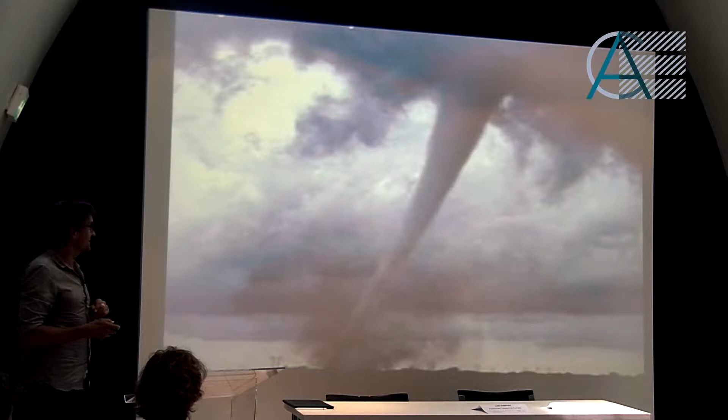So we start here. There's text missing on the upper side, but don't mind. It's a bit in the sense of once upon a time, people had to protect against the cold, the coldness, the wet, the rain, the flood, stormy weather, and so on, and the wild beasts. And so they had to find some shelter to protect. But it was cold in these caverns, so they had to invent the fire to get some heating and fire for other supplies, for other opportunities.

What then happened? It was so comfortable in these hot caverns that the population grew. And we had so much population in this world that the caverns were not anymore sufficient for these people. What should we do now? That's what had been done.

Trying to understand what could be done. Oh, it's really bad.

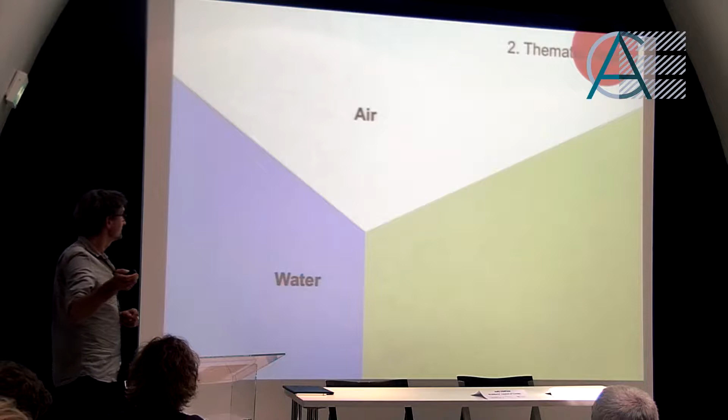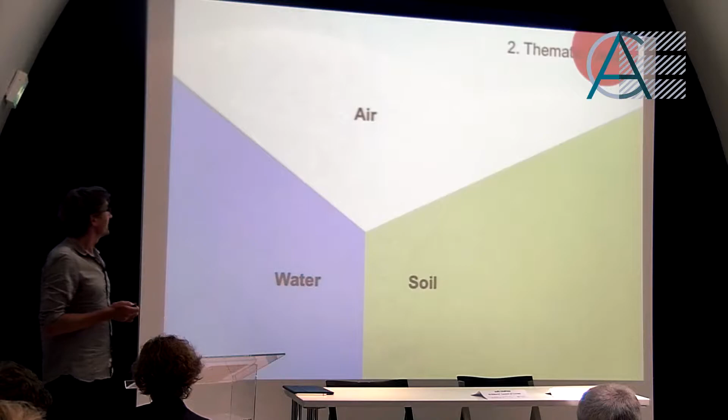Then we have these thematic fields. This is the air, the water, and the soil. So all these 3 are components, compounds that we are using as resource, and we are emitting in the air, in water, in soil by our acting. And in all this, there's energy, which plays a crucial role, or an important role, should I say. And there has to be a balance between all these 4 elements: air, water, soil, energy.

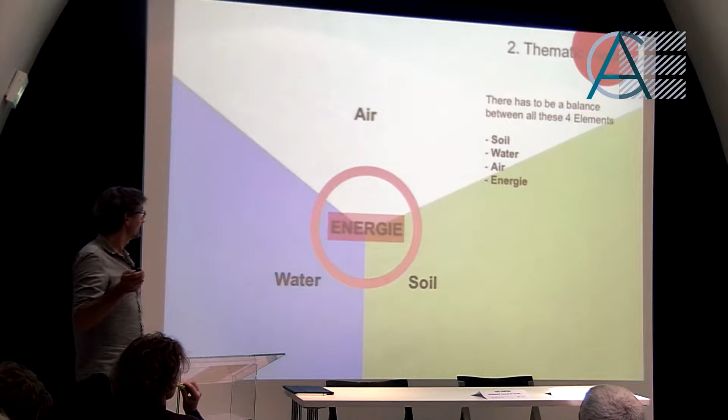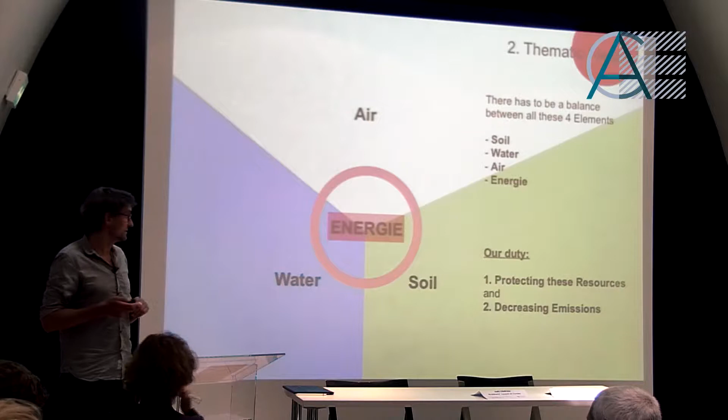Yes. And it's a bit our duty to protect these resources and to decrease or avoid emissions. And in fact, in a certain kind of definition, these 2 points, protecting resources and decreasing or avoiding emissions, are the basic points of sustainability.

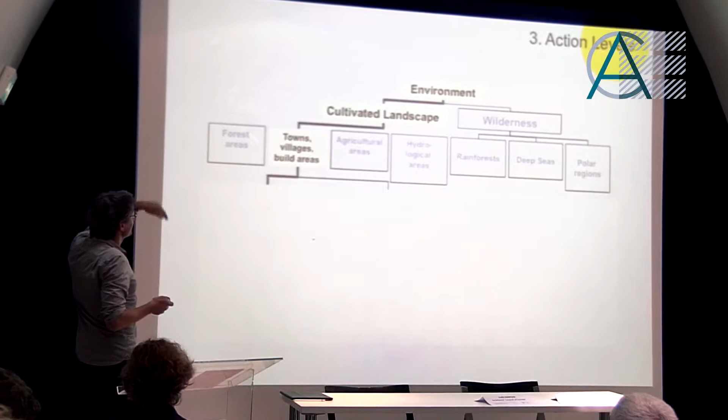So the action levels, for example, the environment globally thought, and perhaps cultivated landscapes, there's a wilderness, and we will follow the left path. For example, the next level, towns, villages, built areas. Other will work on forest areas, agricultural areas, hydrological areas, and so on.

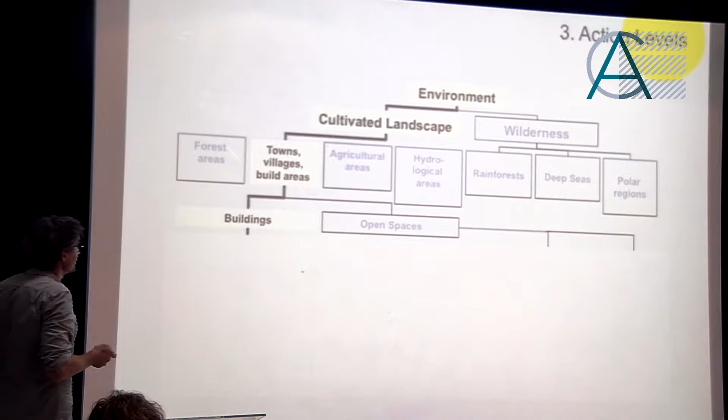Then we go beyond on buildings, on the other hand, they are open space, not built areas. We're going down to the type of buildings: production, living, commercial, and so on. In the open spaces, we have, for example, playgrounds, parking, and other places, and so on. So you go beyond, and on every level, you have the discussions about resources and emissions. And we go down to the walls, for example, perhaps wooden walls, why not?

So we have these 3 points, the global context, the fields, and the action levels, who has to be combined and viewed together. Efficiency.

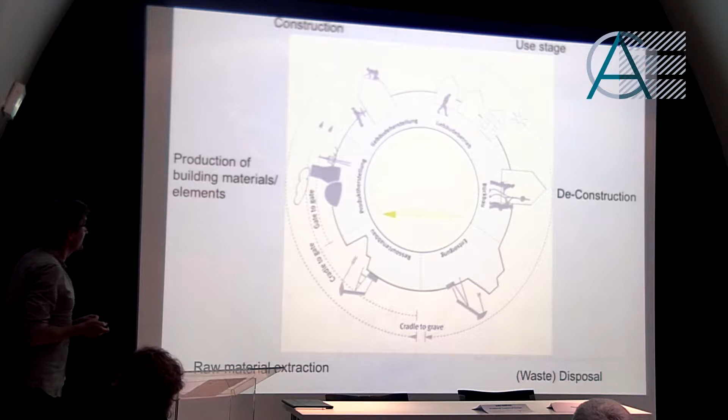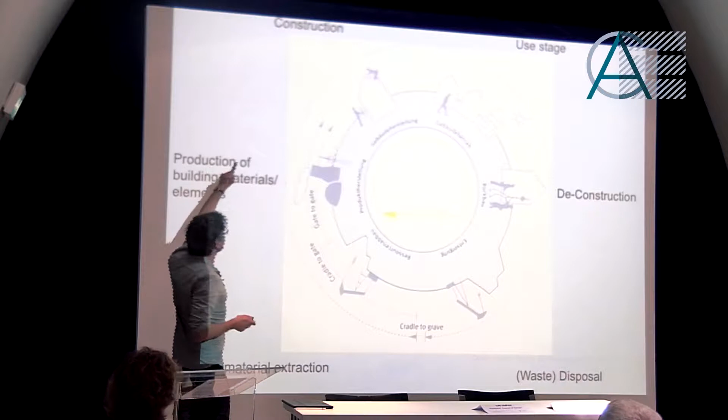So, this is a well-known figure. I think all of you will know it. It's about, c'est un cercle, it's a circle, it's the circle of sustainability. And perhaps we start from raw material extraction, are going to production of building materials, elements. We are building a house, it's construction, the use stage, the deconstruction. And if all is going well, we can pass directly from the deconstruction to the production of building elements and restart from zero. Otherwise, we will have the stage of waste disposal or disposal of the unusable material.

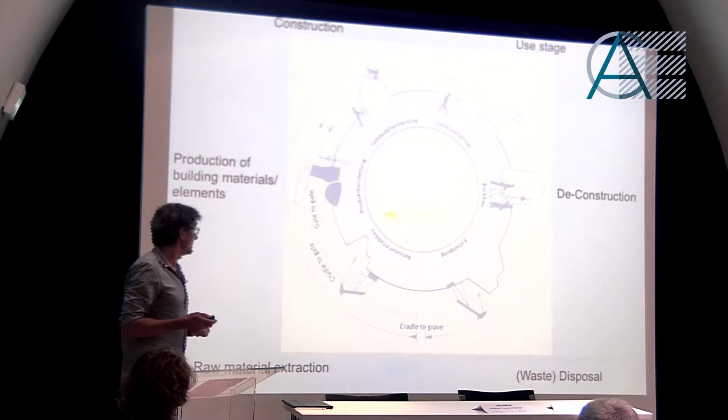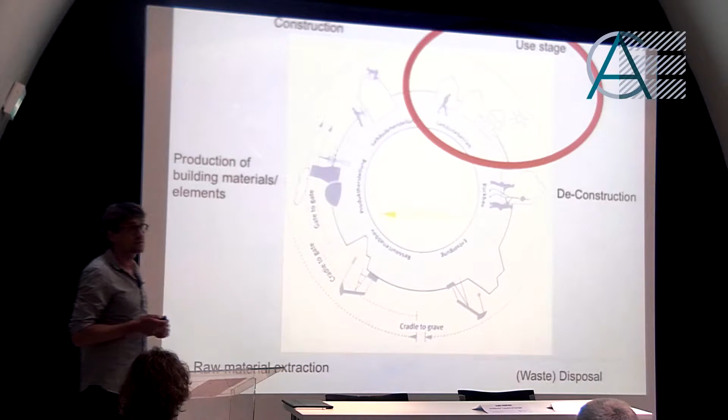So, and mostly we are occupied by viewing and dealing and calculating in the field of the use stage. So our energy efficiency debate is mostly about these figures. The EPCs are based on that.

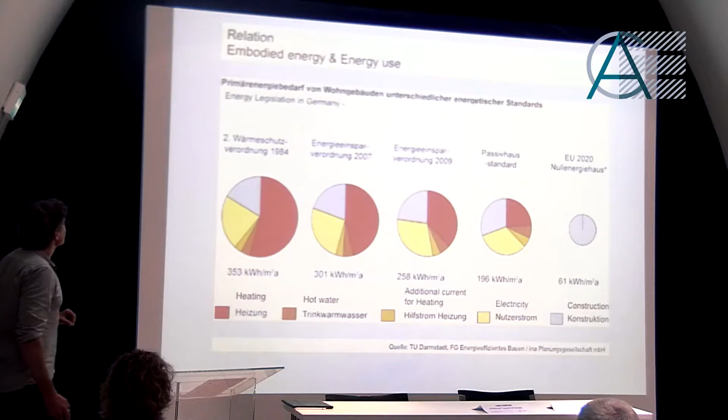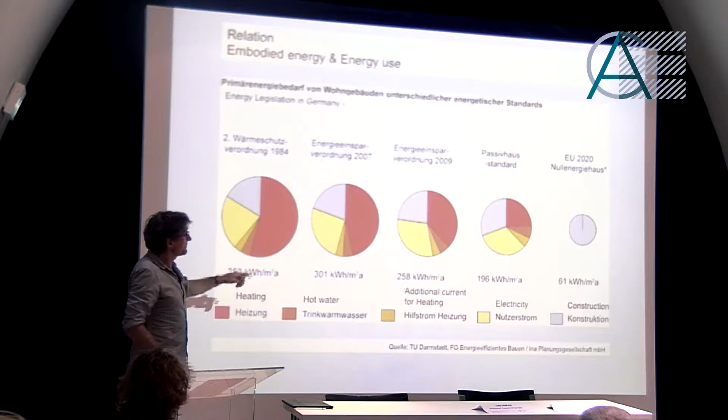So, and here I show you some figure. It has been calculated from the university in Darmstadt. The development of the EPCs of the different standards coming from, this is not very important, but 84 to 2007 in Germany. And you see red amount of heating, hot water, additional current for heating, electricity, and construction. And the further we are going on, the more this gray color is getting important. All of this is getting smaller, but at the end, the last one, the construction, is getting very important.

So it's an almost zero energy house, and we have it here, and at the end it's 100%, and this should be our challenge, the new challenge in thinking energy.

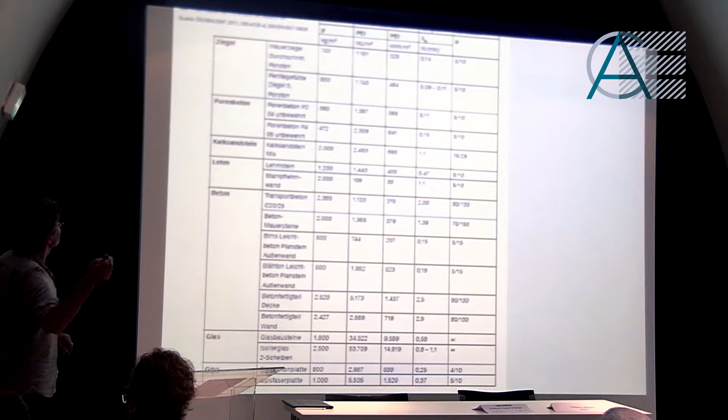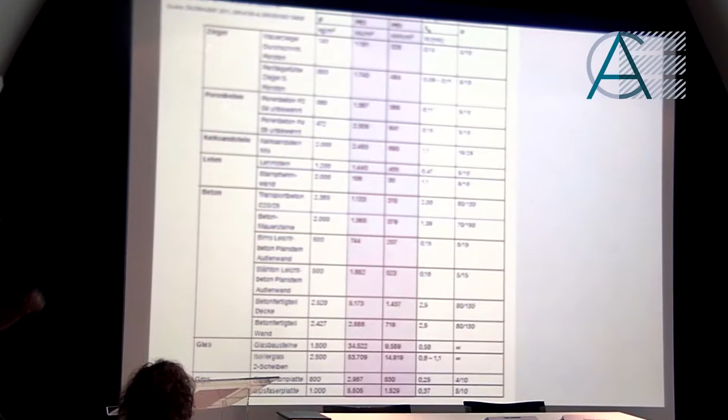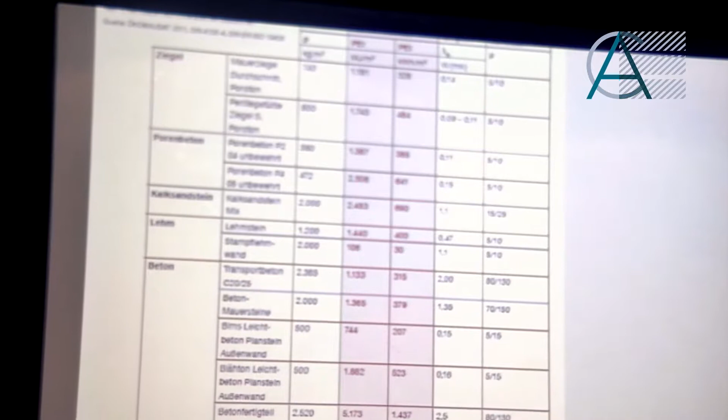Here, for example, I put it in red. You see one chart with the PEI values. PEI in German is Primärenergieinhalt, the content of primary energy, or gray energy, énergie grise. In the red you see some values you can work with, if you know how to work with these figures.

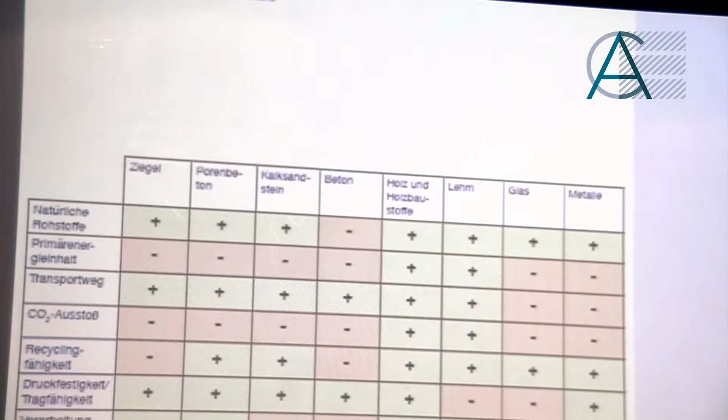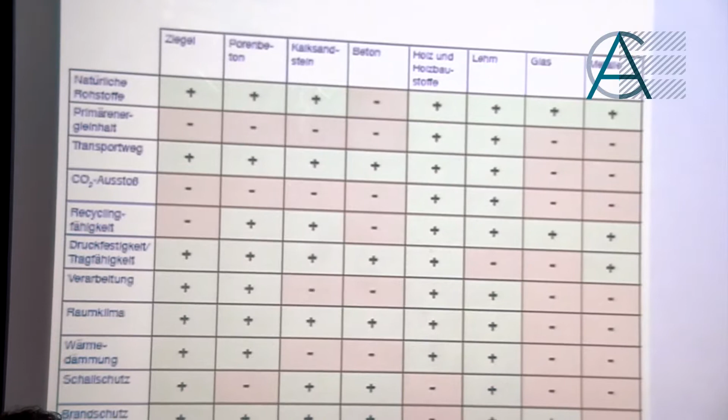In this leaflet you also have a kind of overview in a very simple way. I think it's very good for architects who are not going very deep into this matter. With a very easy plus and minus, there's a description of building materials, for example primary energy content, Transportweg, the distance of transport, and the CO2 emission values.

And you have, for example, the bricks, the béton cellulaire, which is a kind of light concrete, and other materials. Okay, so it's for your first overview.

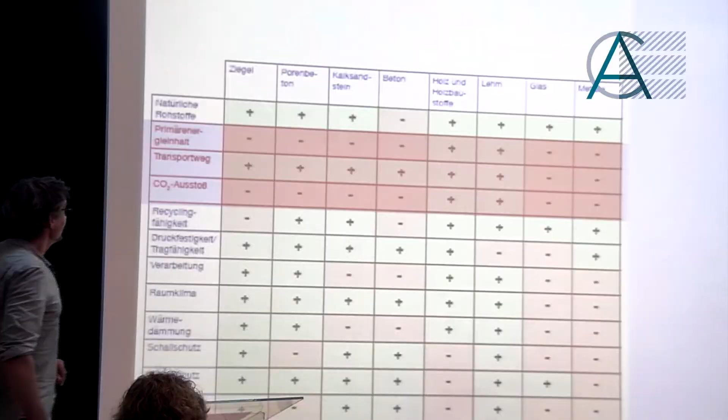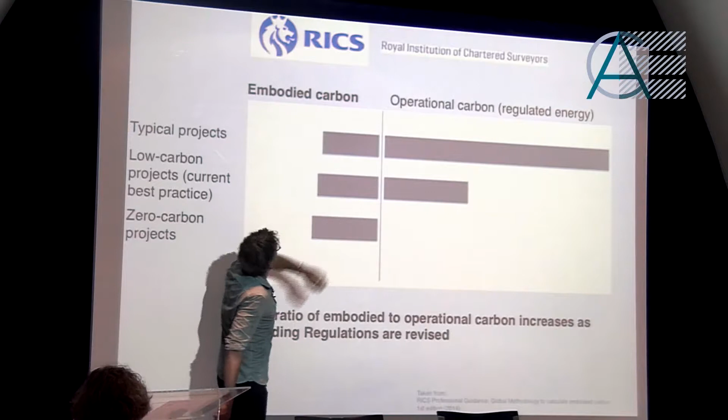Yeah, I will go on quickly. It's another one you will know, the RICS, Royal Institution of Chartered Surveyors. You see the typical projects, embodied carbon on the left side, operational carbon, the regulated energy, that's what I showed you before in the red circle. These are the typical or normal project, the low carbon project and the zero carbon project, and you have the same figure, there's only left energy in the embodied sector.

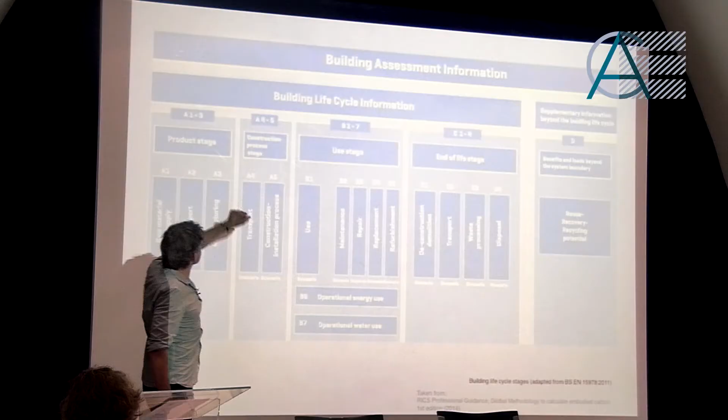So perhaps you will know this, it's repeating in different figures, and we are coming here to the building assessment information with the different building life cycle information. Perhaps you know we have these stages from A till D, from the product stage to the construction stage, the use stage, end of life, and afterwards. In D we have some additional qualities.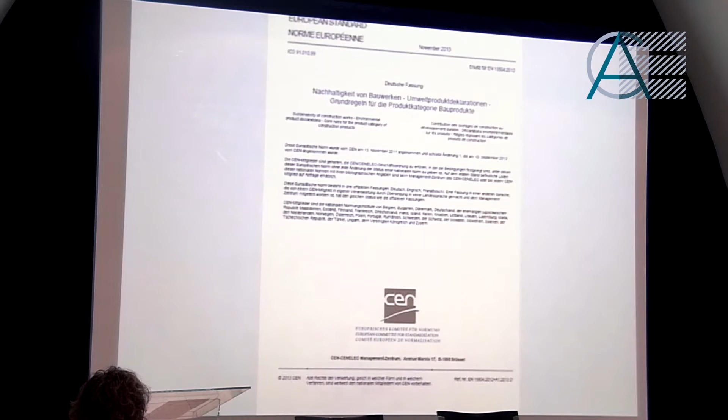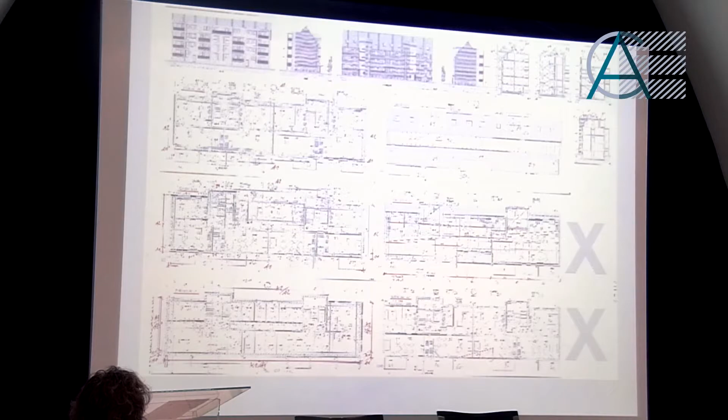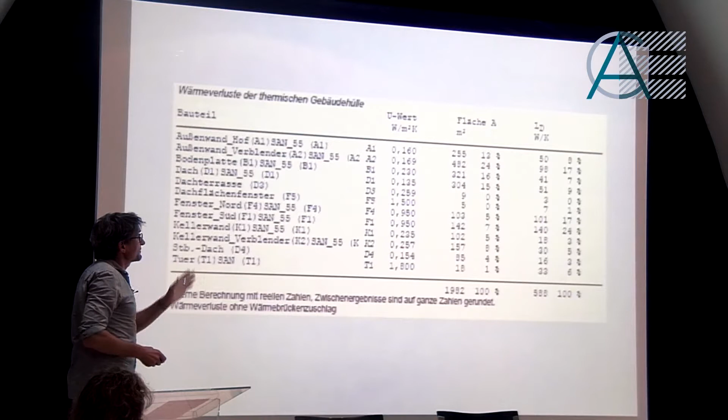And I go on further, it's a DIN. I calculated an example from a small house of 16 units. We took the square meters and the percentage of the building and took the building elements. I think it's a PDF, not a PowerPoint presentation.

I used the Ökobaudat in Germany, a very big database for the data we use for these calculations. You see, for example, you have the mineral elements, insulation materials, and all this. This is an example.

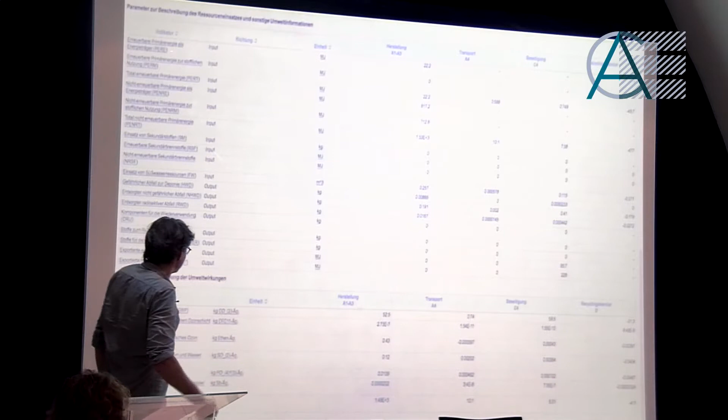You have the phases A, here C and D, and you have the values you can calculate with. I did it with this building, and you can see a little bit the material proportions, the values in cubic meters: a lot of concrete and a big amount in cubic meters of insulation.

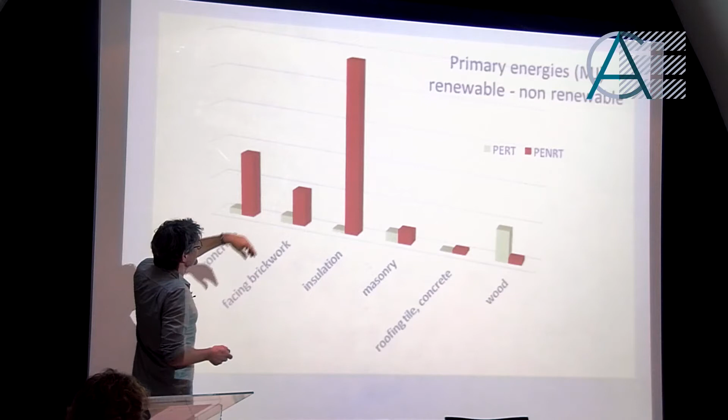This is not bad, yes, I hurry up. What's interesting is to see the primary energies in these materials, the renewable and non-renewable amount. Non-renewable is the red one. For example, the insulation has a very big amount of non-renewable energies.

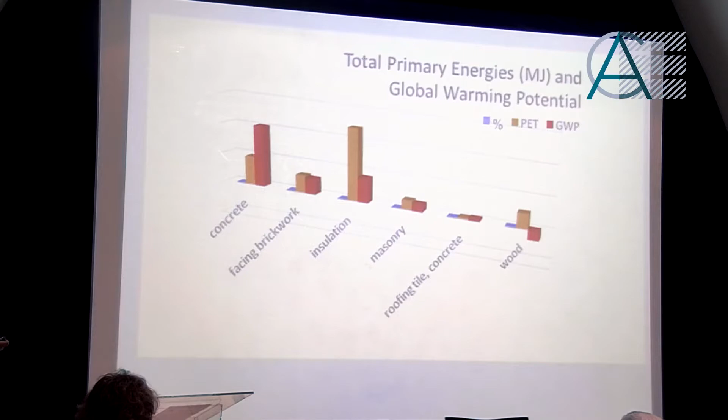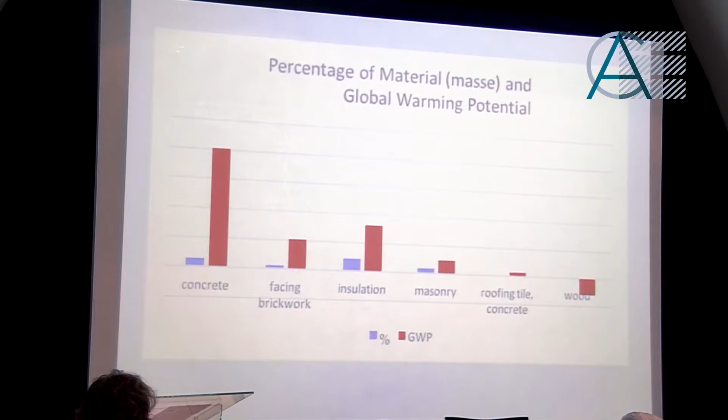And you can go further on and make different combinations to see, for example, the global warming potential, and the last point, the wood, as a negative one. It's the same here. Okay, so this was a very rough one.

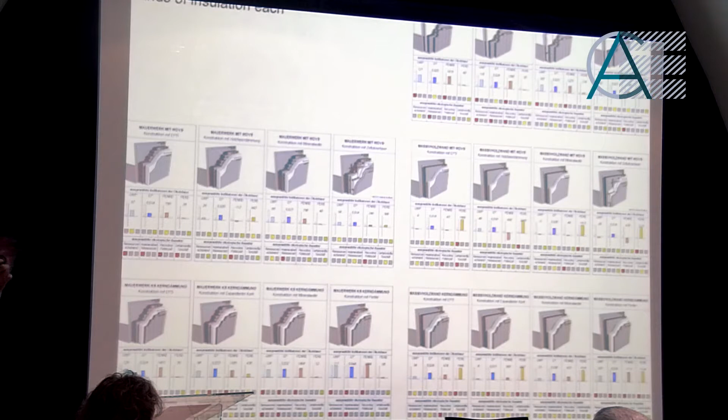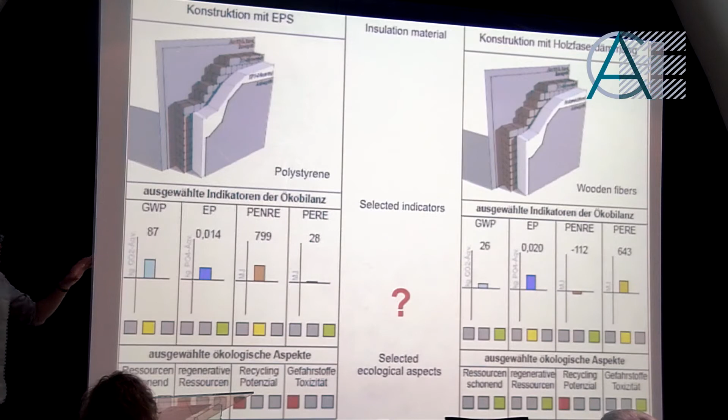I entered a bit more deeply and established, in this case, 20 different outwall constellations. I will not explain all of them, but you arrive, with selected indicators, to see a little bit what's going on and what perhaps can be chosen afterwards.

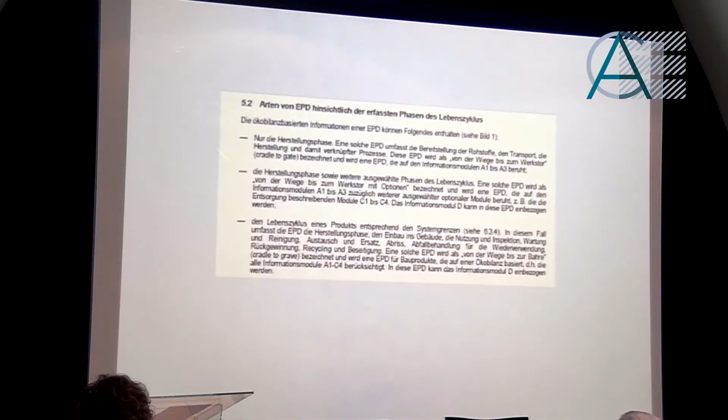What is very difficult at the end is to see in our values, in our database, that there's a lot of values that don't exist. For example, we have the values of the production of the material, but there's no data for the rest of life. In some cases, it's 50% of energy which is going on in these values. So in all these buildings there's a lot of energy, and we have to learn how to measure it.

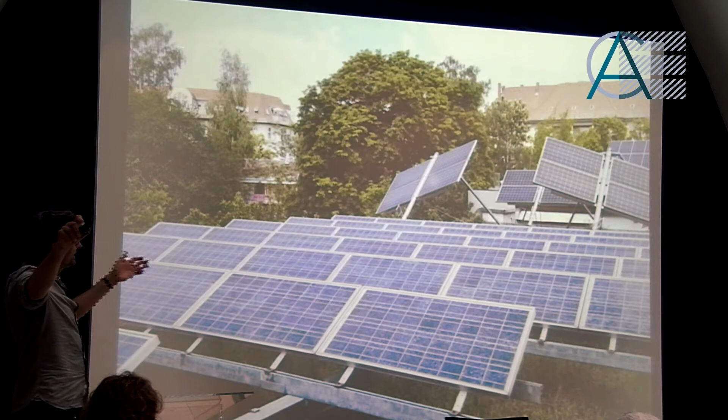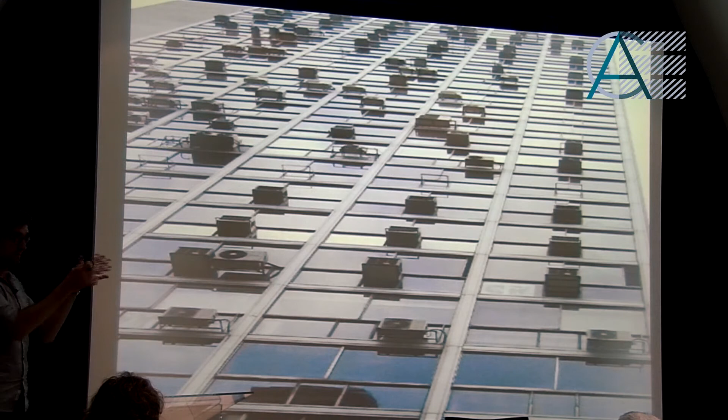Even in electrical plants and photovoltaic installations, in this kind of nice decoration of buildings, the ACs, it's a solution for the indoor climate. It's a small solution, but you make a very big input of energy by building them and putting them in this situation in these apartments. Amendments, it's the same.

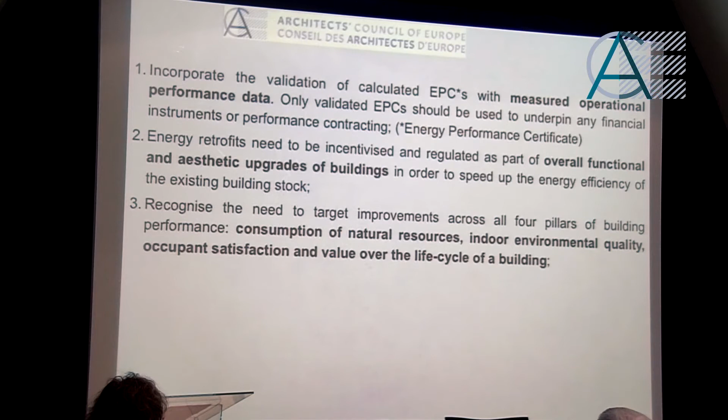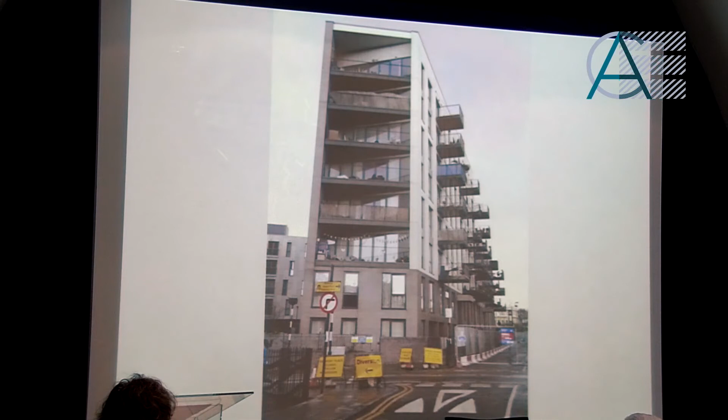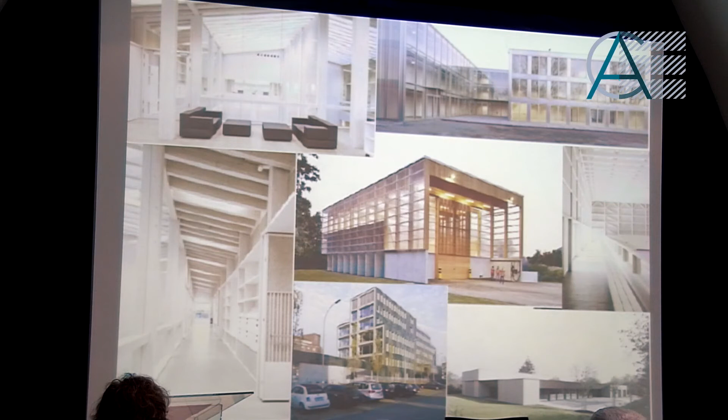It's our ACE amendments, I think we talked about this morning. I wouldn't like to repeat the last pictures: a lot of embodied energies staying here, recycling embodied energies, recycling every time possible. Afterwards, new wooden constructions here in London, you will know it, I think. In Germany we have a kind of competition about wooden buildings in commercial buildings and official buildings. So it's very important, we have a lot to do.

I think this is true: we are responsible for every one of our acts, but also for not acting at all. So we have to go on - renewable energies, resources, design, functionality, affordability, climate friendliness, sufficientness, and at the end, for our children and grandchildren. Thank you.